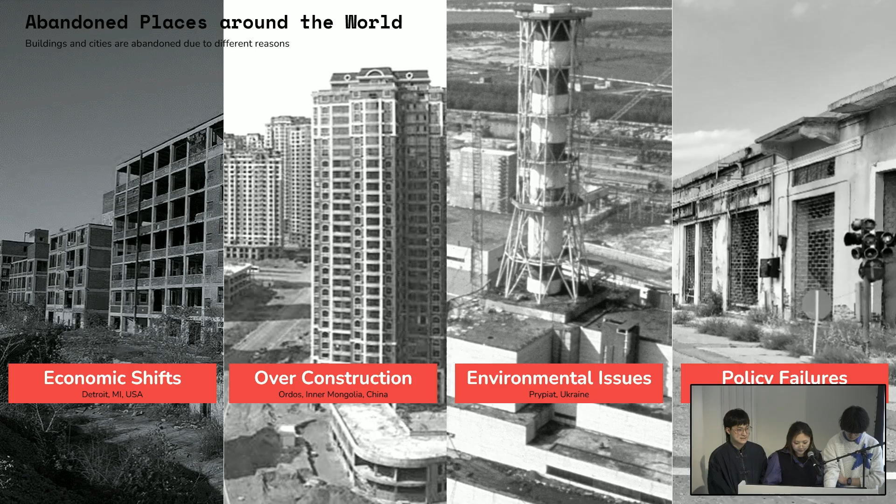Abandonment often results from economic shifts, such as Detroit's decline due to the collapse of its auto industry. Overconstruction is another cause. Ordos, China overbuilt infrastructure with minimal use. And environmental disasters like Chernobyl left Pripyat uninhabited. Policy failures like Varosha, Cyprus also contribute. As architects, our goal is to design cities that evolve and avoid abandonment.

In creating a prototypical city, we focus mainly on addressing key issues of economic shift and overconstruction. We aim to develop a system that can adapt to these changes, ensuring the city emerges to be resilient and responsive to future demand. Tokyo is an example of an emerging city. After the 1950s, it rapidly grew with buildings following a 30-year life cycle to meet modern standards, addressing high land values, earthquake code, and modernization needs.

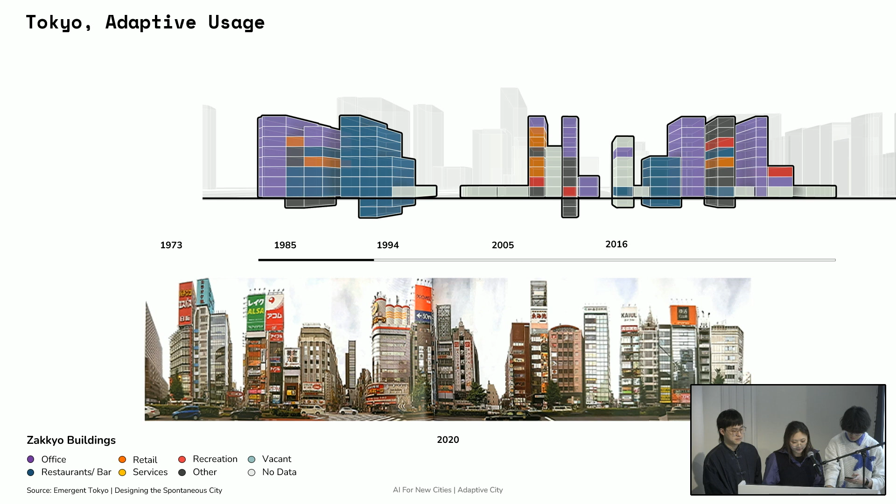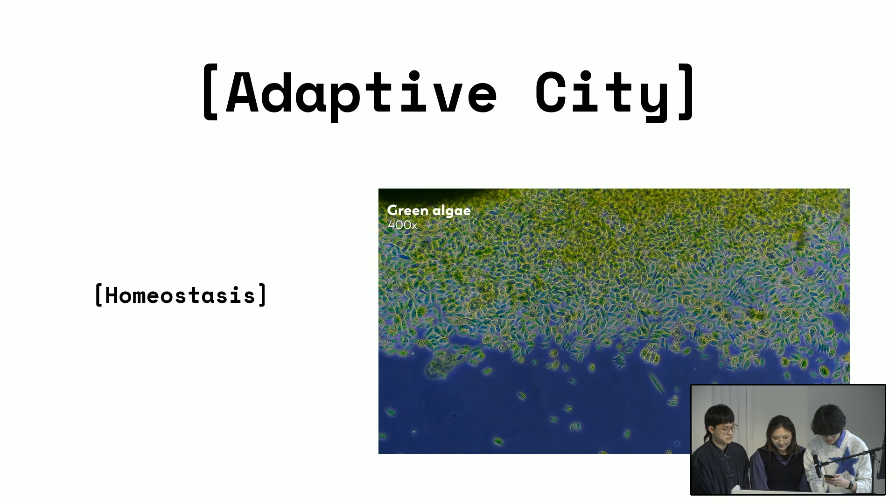Tokyo also features adaptive structures like Zakkyo buildings, which house mixed-use space, adapting to urban needs over time. The diagram shows how this building evolved vertically while retaining the same footprint to maximize space. So we are aiming to explore the idea of cities that are temporary as physical while permanent as a system. Cities as a container for many human beings would be able to cope with potential natural disasters and social context change. That's how the word homeostasis is described.

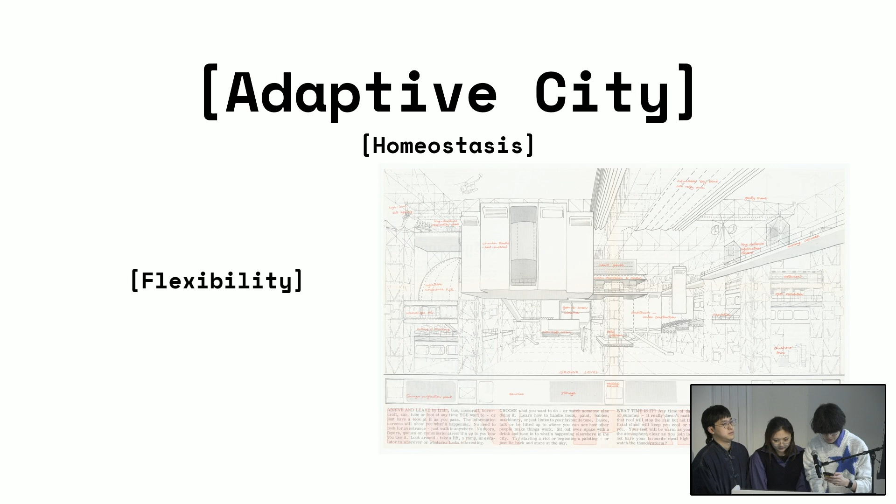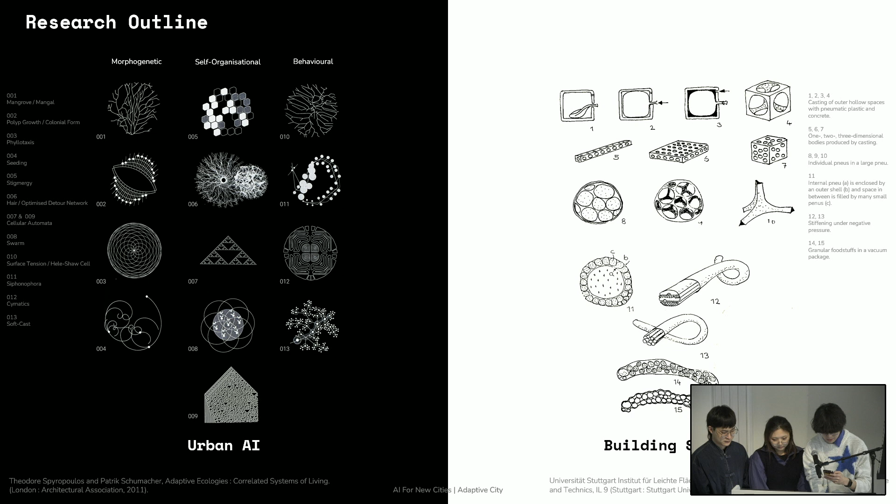And to achieve this dynamic balance, the building should have enough flexibility to deal with potential change, and also time plays an important role in this process. The change will be based on the last second and influence the next second. Our research outline will include two branches, urban AI and building system. In the first branch, we are exploring the simple rules of urban growth and the logic of function switch in the city. While for the building branch, we are exploring the system that brings energy into the building and allows the change to happen.

So in our first chapter, our urban morphology is inspired by how cells just follow the basic behavior that's recorded in their DNA and aggregate into very complex creatures. Our previous research is about how to use a global field to control the growth, and we explore how the different behaviors that we input change the output pattern.

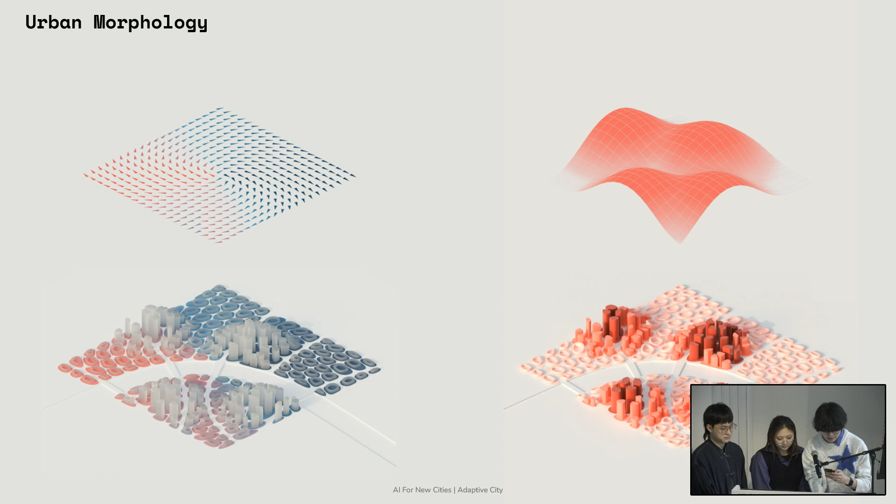And then we want to push this simulation into a more realistic approach. We start to think about how these cells behave in real cities, and also what the buildings' behavior will be in the cells. So we set different behaviors of both cells and buildings, and they are influenced by the previous stage, and transfer their properties to sub-elements. Using their behaviors and just the initial conditions, the city can grow itself.

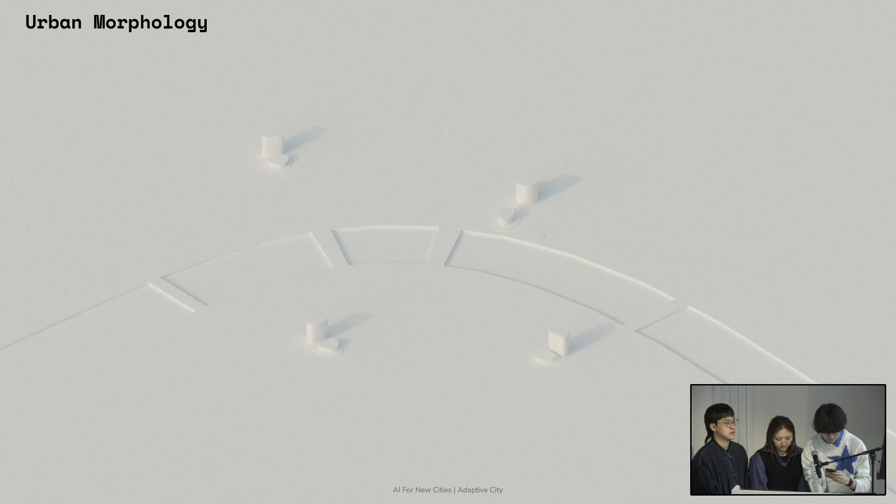So we are exploring the two approaches at first. No, sorry.

So for the site, we chose Canary Wharf. From the old time, Canary Wharf was a dockyard that played a major role in global trade, which lasted until 1960, when the dock fell into decline. In the late 1980s, the area was redeveloped into a modern financial hub. Skyscrapers like One Canada Square in 1991 symbolized this phase, attracting major banks and financial institutions.

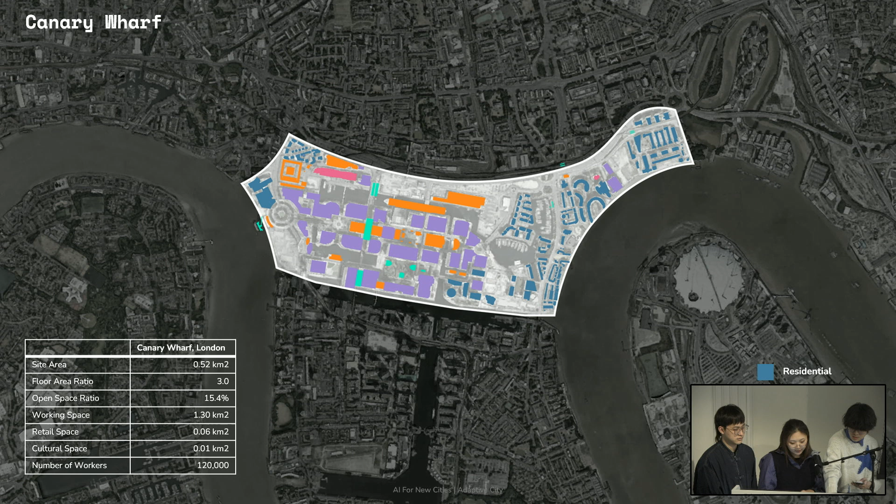However, due to the high vacancy rate, Canary Wharf is adapting itself again by adding more residential development and becoming an integrated neighborhood with entertainment, shopping, and parks. This mixed-use approach aims to reduce reliance on office tenants as hybrid work and changing market conditions challenge traditional financial districts. Here in this chart, you can see that the vacancy rate of Canary Wharf offices is high, and it goes as much as 50%.

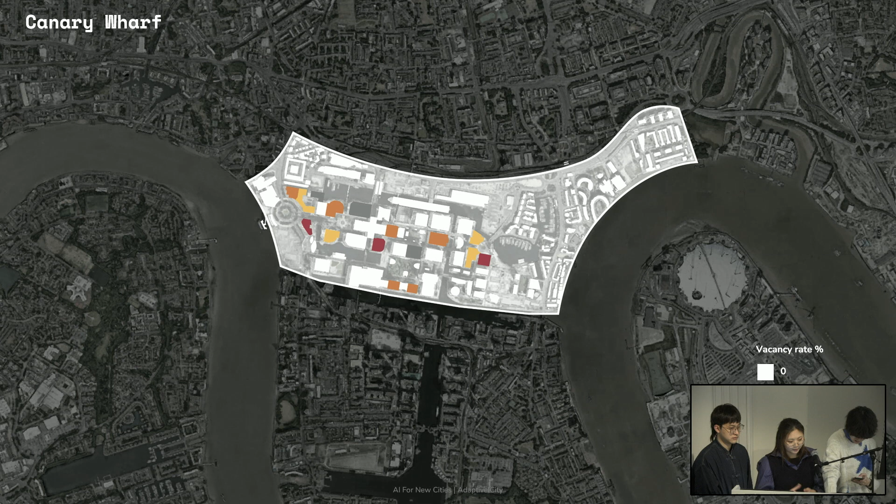From this information, we know that although it tries to change or adapt, it's not fast enough, and people will still move forward. So that's why we want to try to integrate our building system into Canary Wharf to see how it would go.

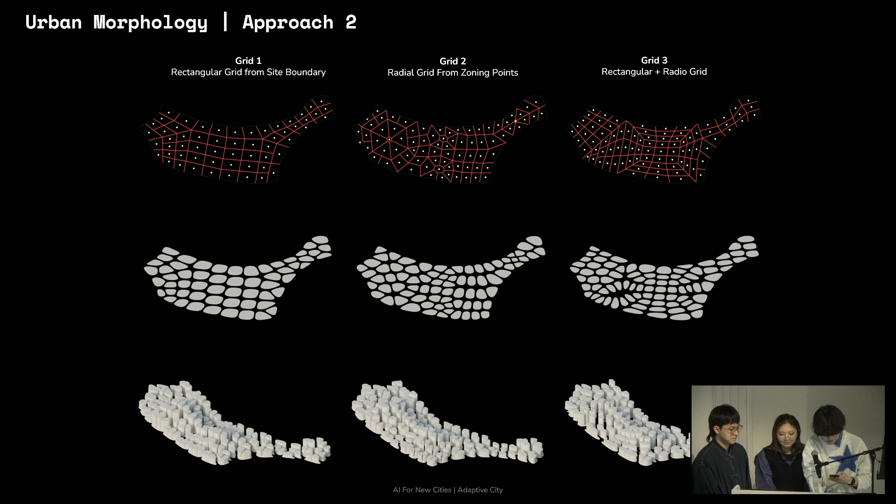So at first, we were exploring two approaches. We first tried to use only the vector field to control the growth, and we also input the existing grid, which gives a more top-down result. So now we're choosing a middle way: to use the field to control the growth, and at the same time, we input the infrastructure to influence the boundary of the pattern.

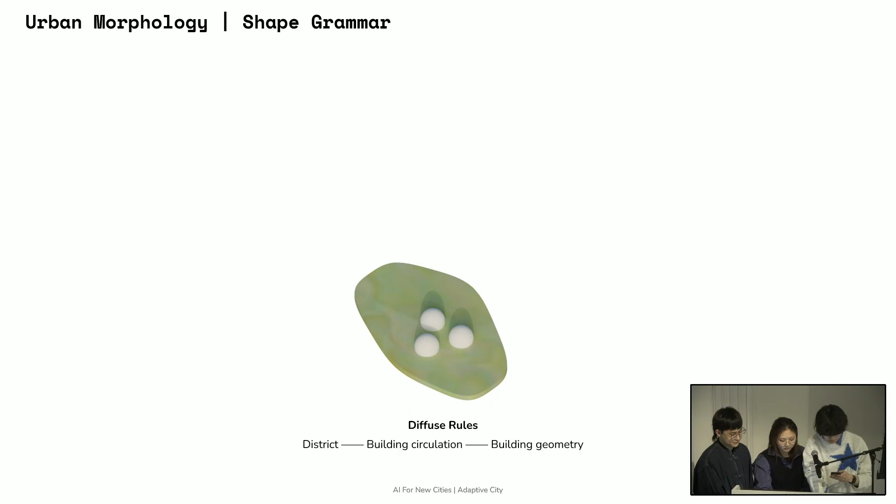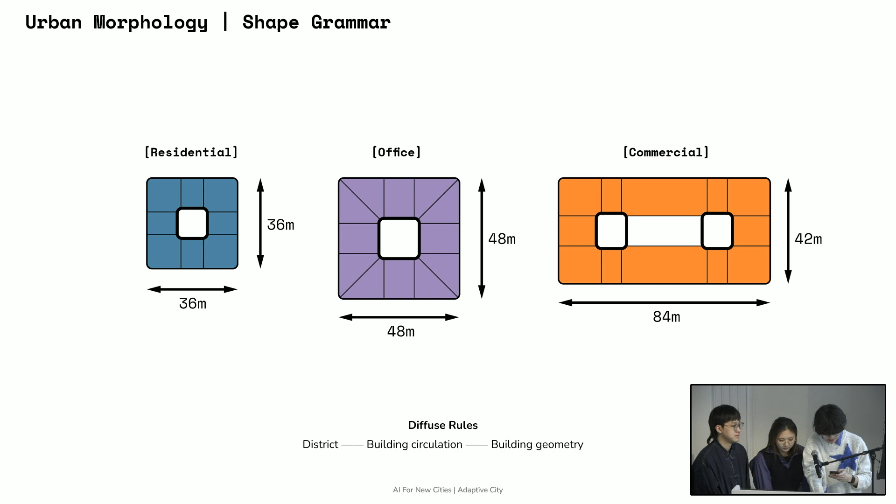So to put the building inside the district, we use the logic of diffuse to get enough distance and create the main circulation of the building. For mid and high density zones, we are using 3 basic floor plates, and these floor plates will also give us some freedom to change the function later. For the low density zone, we are trying to merge different circulation to create a continuous footprint.

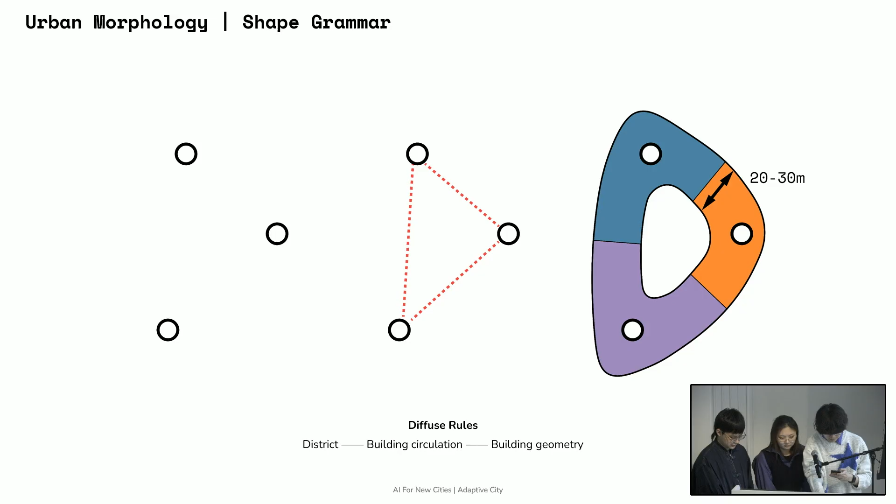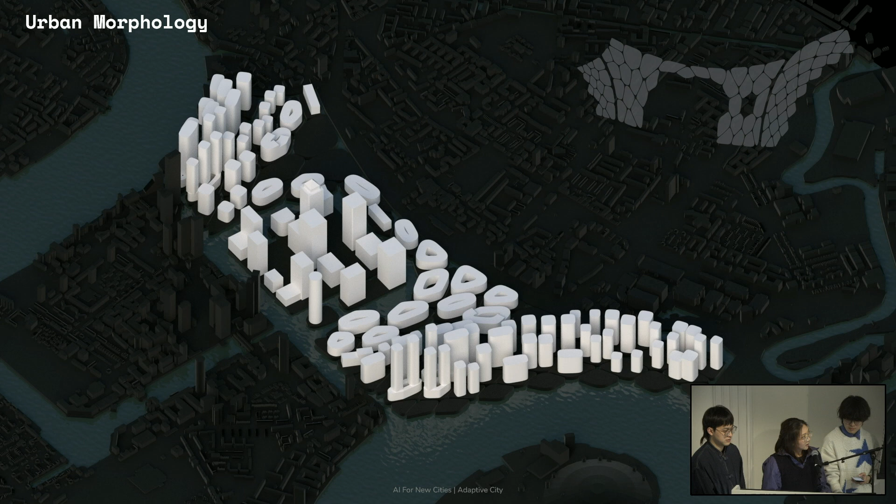And this is our urban simulation based on the rules we talked about before. For our urban morphology, we learned from Tokyo how they have hybrid buildings with a convenient walking network for people that greatly increases the accessibility for most of the buildings. The buildings are connected in 3D space and become 3D alleyways of the city. This type of network inspired us to connect our buildings in 3D space vertically.

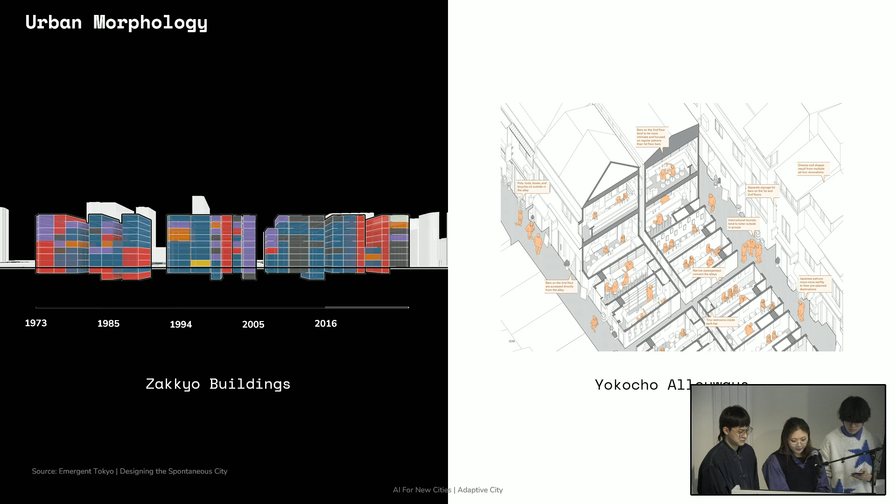Here we introduce the line network that will carve out part of the building to retain the relation of urban space with our building blocks. This line will emerge from both global and local rules. The global rule is that the 3D network will try to connect itself, pointing to the city center, or in this case, the green space, while locally the line will open the ground area of the building to create an opening facing in or out of the street adjacent to the parcel.

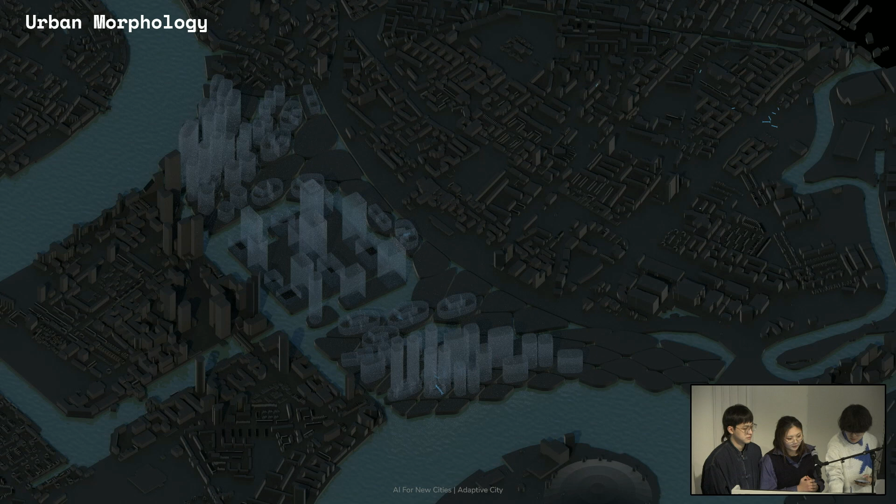The red line here shows the 3D connection coming out of the border of the parcel in space while attracting to the green area as mentioned. This line then translates into the low poly surface, ready to carve out of the building, which will give each building character in relation to the urban surroundings. Here's an example of the carved out cluster of the parcel with the blue line. And this line shows the growth of that 3D network that would connect the building blocks together while carved out.

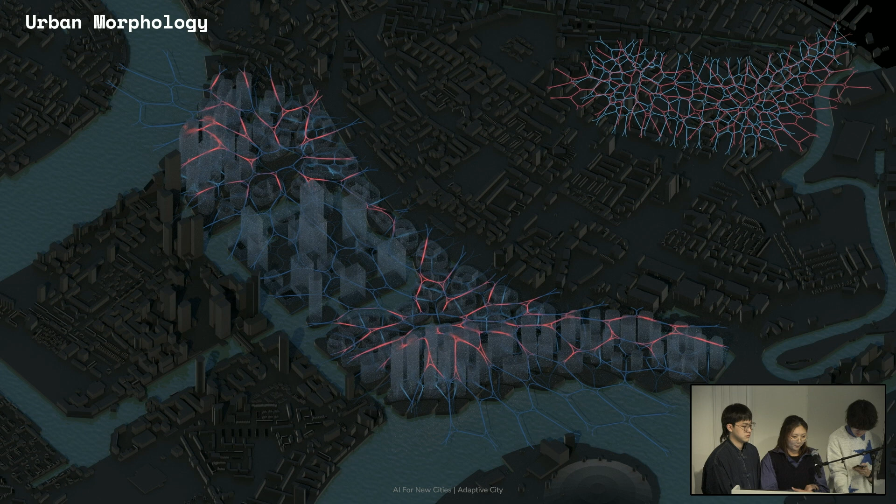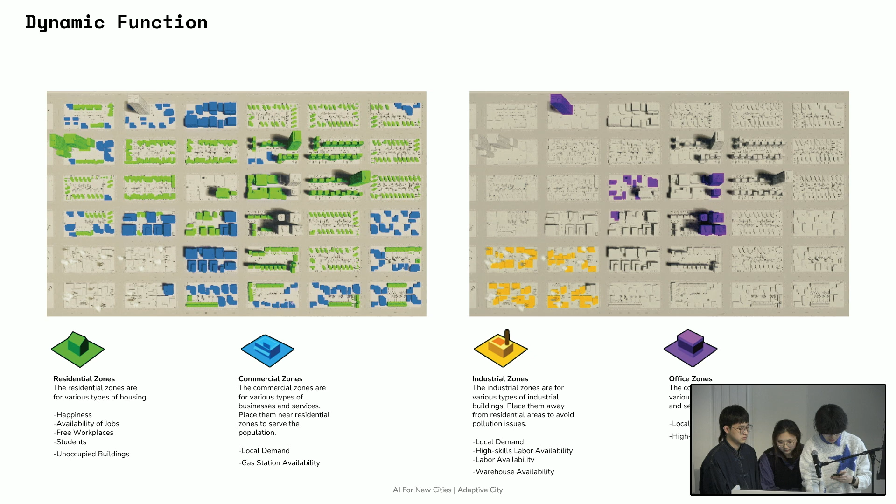So another issue we noticed is that in Cities: Skylines, abandonment also happened, and they have an algorithm to evaluate it. The evaluation system is based on different functions, while the only way to use the abandoned buildings is to demolish them. So for our dynamic system, we are trying to allow them to change the function based on simple rules. So we will have 2 kinds of agents at first: the first is the construction agent, and the next one is the openness agent. Within the construction agent, we subdivide them into different functions.

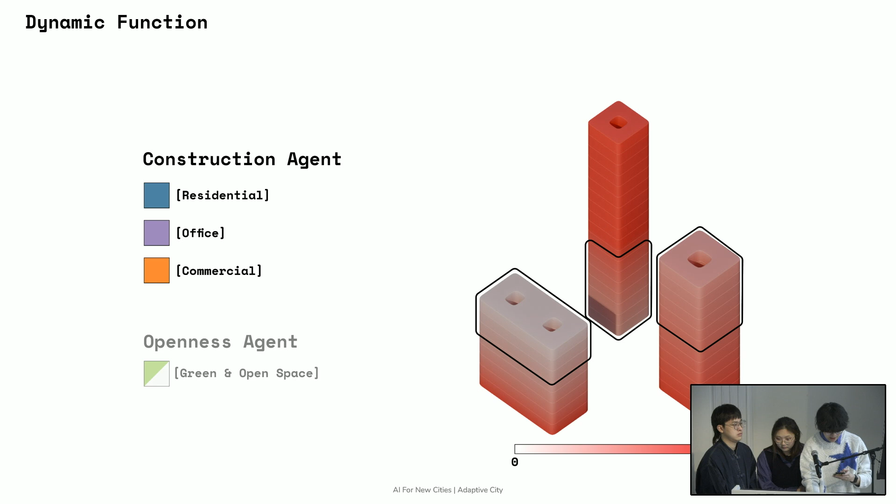So we will evaluate the score of each unit, and if the number is lower than a certain number, they will try to sell their unit to another agent. And if another agent can get a higher score here, they will be willing to take it. The green and openness agent is a special rule. The construction agent tries to sell their floor to the openness agent because they can create a gap between different functions and improve the quality of what remains.

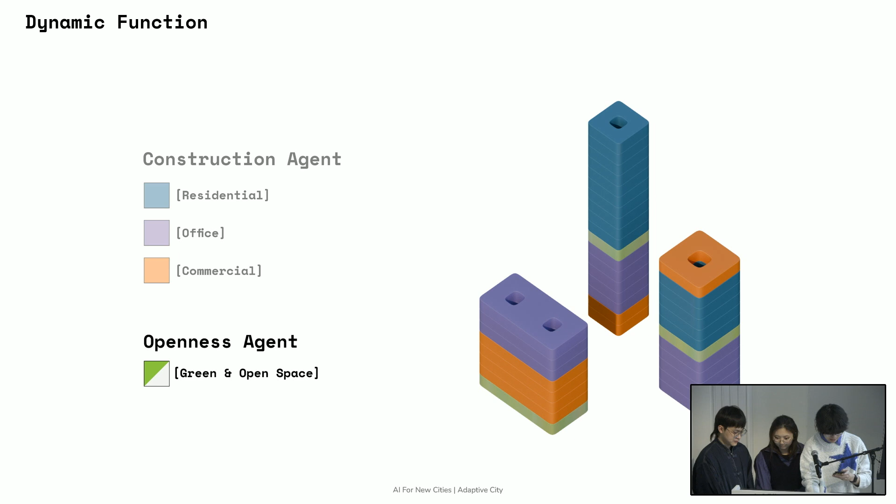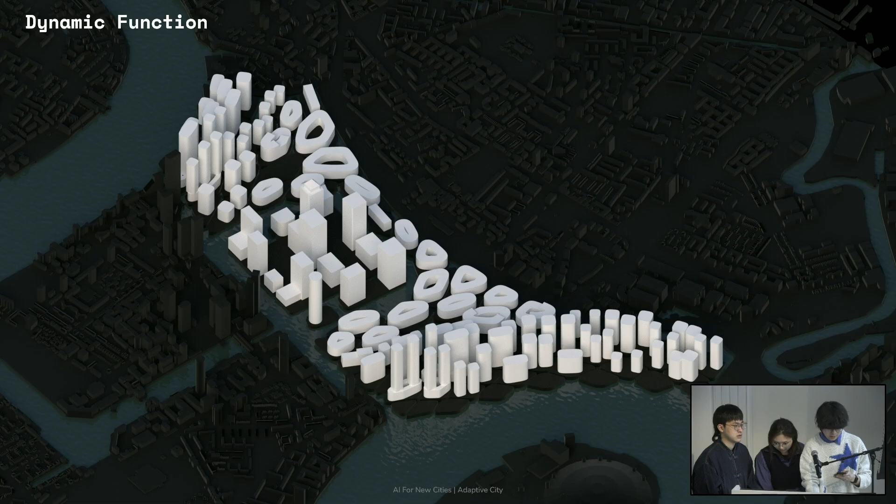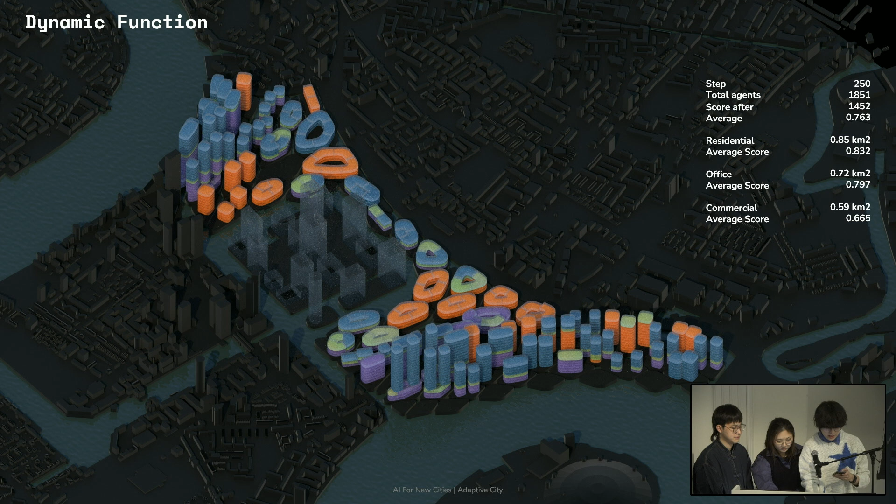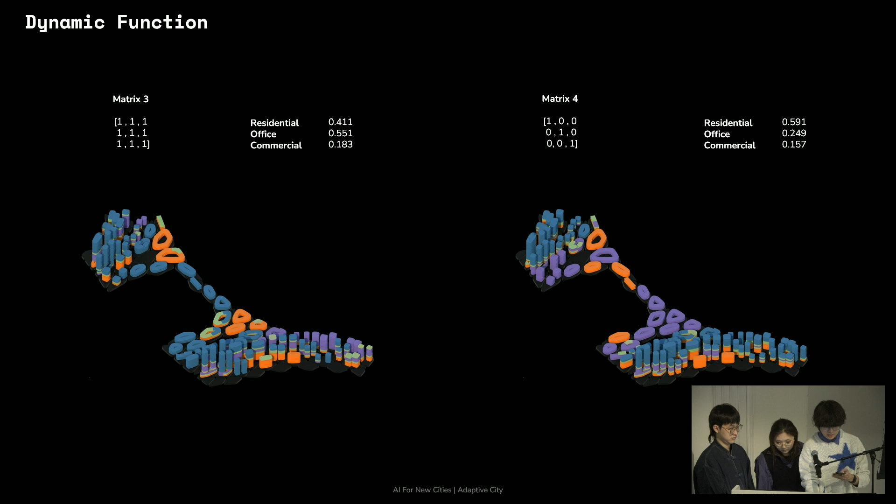And the score, the evaluation system, is based on this function matrix and the distance and the height function. So that's the way we evaluate the score of each unit in our urban simulation. And we are able to see from the output that each unit gets a little bit higher score than the previous one. And we also set different matrices for the simulation, and they give us different kinds of output. And this is a way that we can control how to influence different functions at the urban level.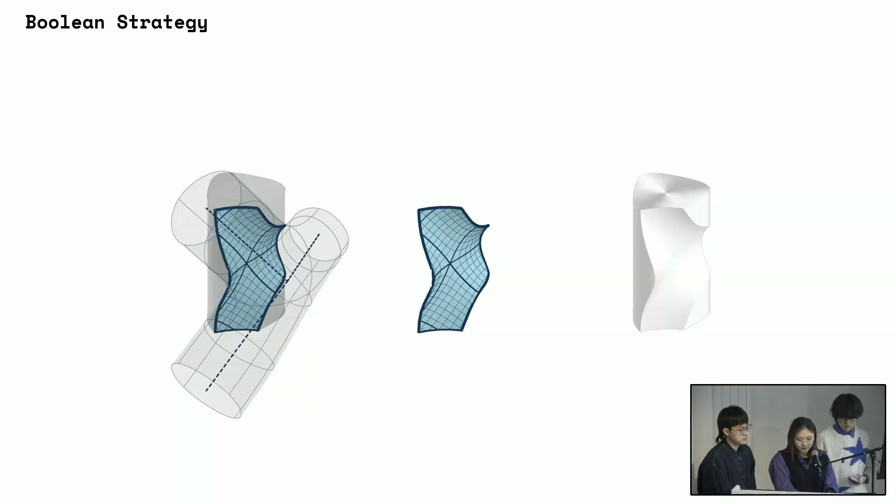So we first tested the Boolean between a primitive geometry and a hypothetical pipe from a different set of curved networks to see the possibilities of geometry we could get. We mean the geometry based on the different number of line connections, from 2 to 5, that cut through the building, at which points are moved within a given bound.

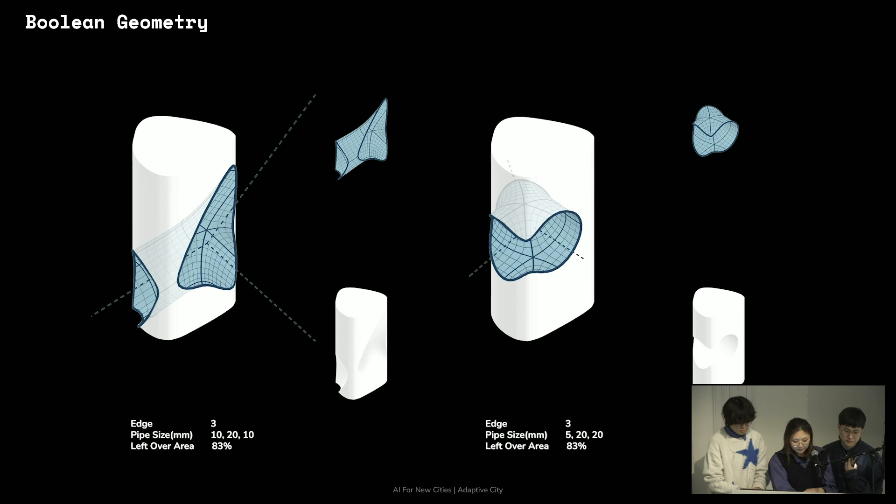The radius of the pipe at each node also affects the outcome. And from this, we select a result that has more than 65% of the volume left, which will be the functional space. And after that, we study the cut and try to put structure in it.

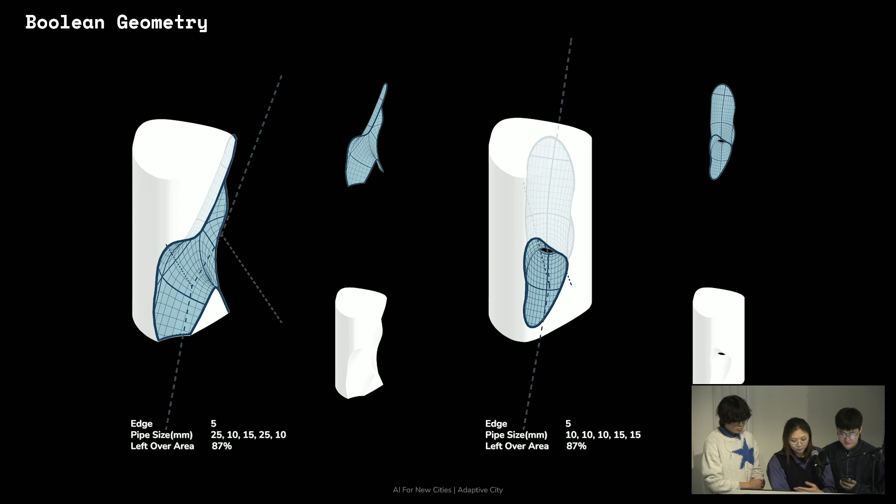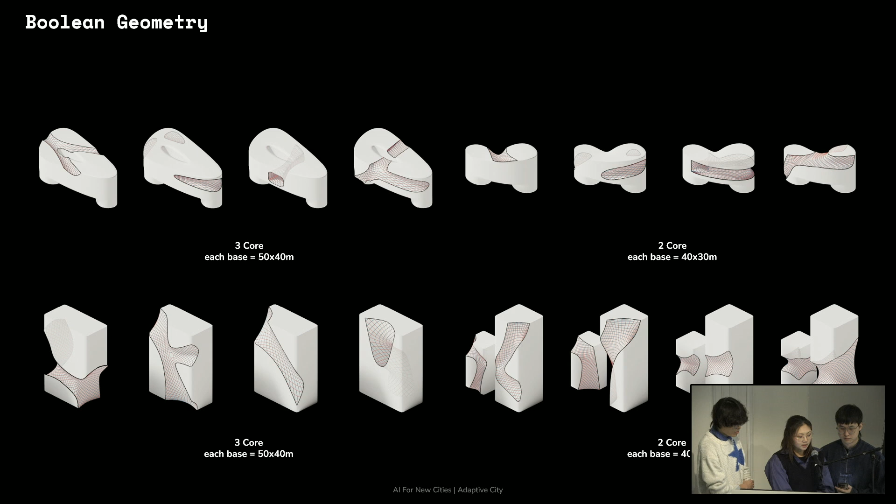So here we try to use the Boolean line with our building geometry from the shape grammar. For the low density, we have 3 core and 2 core accordingly. So for this cut, we categorize into 3 types. The first one is to cut at the top, which will create skylight.

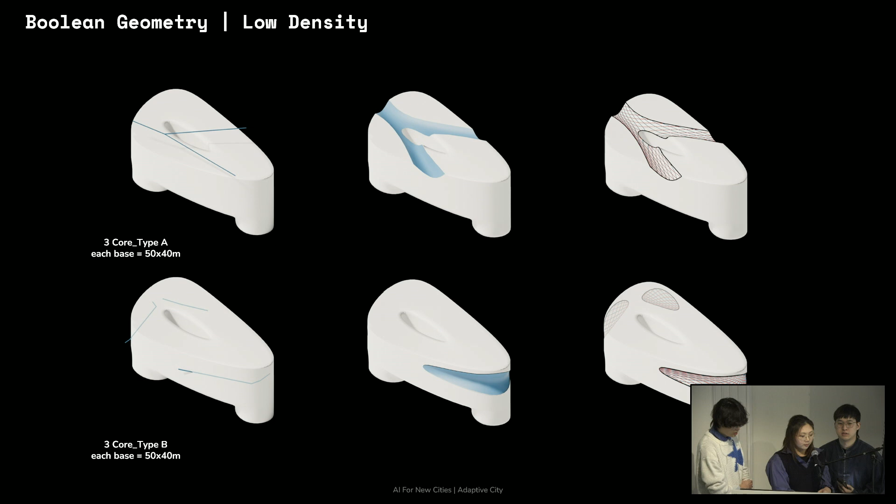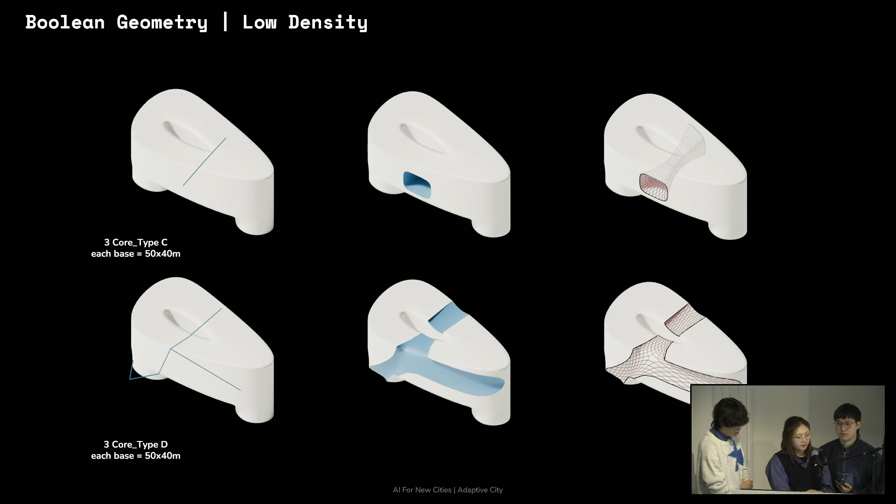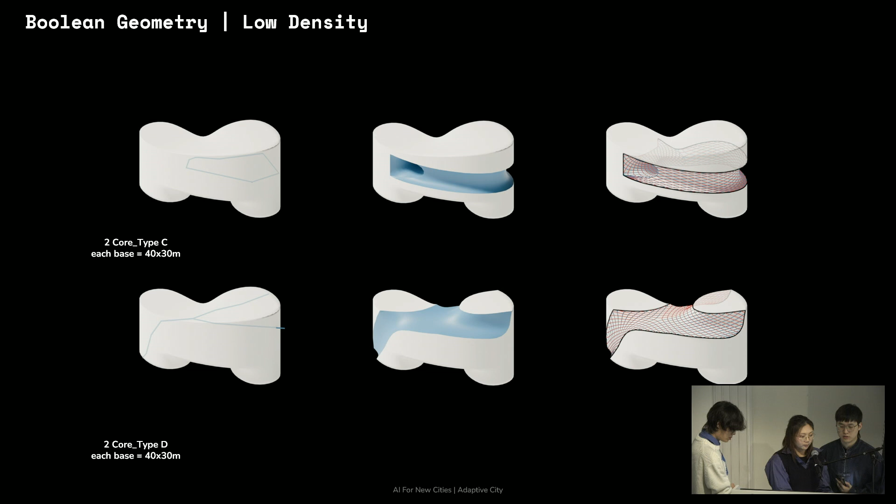And the next one is the side. This could bring out the opening and could also make a balcony. The third one is the cut through, which could create the bridge in between within the building space. And the next one is the mix between any of those types. And this will follow the same rules. And you can see that with different type of geometry, it will also create a unique type of space within.

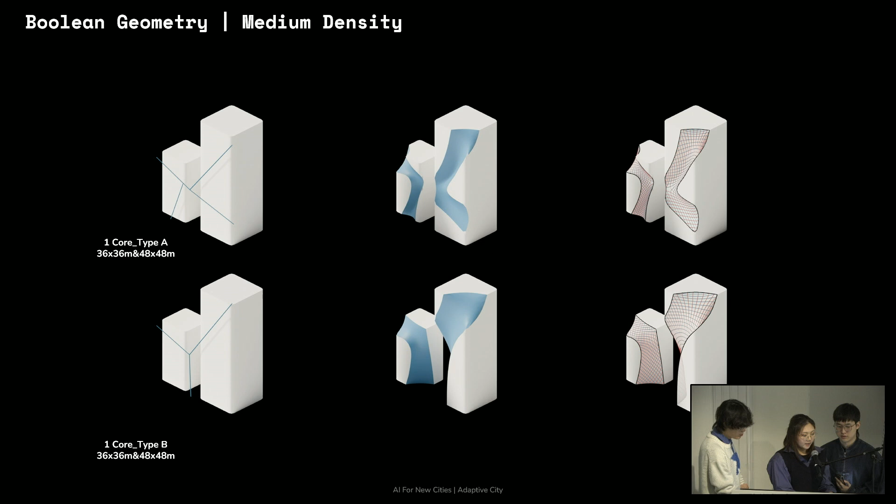For the medium density part, we use the cut line with slightly different logic. So here is the 2 cut line that will carve out the building to create an opening, or the 3 cut line Y shape that will create some facade for the building, and 1 line or cut through as well. Here is the line that goes from 2 buildings together that pair up and cut with the same line here.

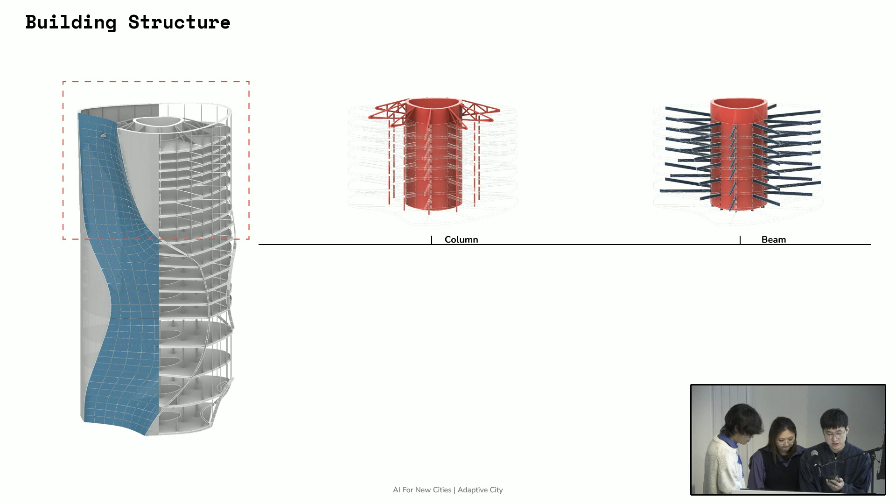Yeah. Okay, so to meet the needs of the rapid functional changes in the urban system, we have introduced a mega truss system. At the top of the building, we set up a mega truss. When there is a need for cantilevering, the vertical loads are transferred upward to the mega truss by means of high tensile steel column in the form of a suspension system. And then the loads are transferred to the foundation through the core.

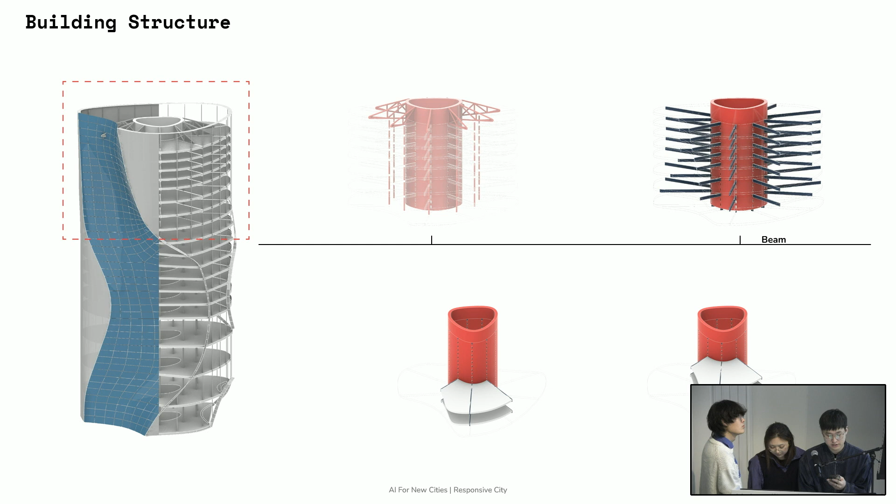So besides the column system, removable beams are connected to the core, which means that the height of the internal space can be changed to satisfy the need. And so this beam and column structure can help to enable the building to adapt to different functions over time more efficiently.

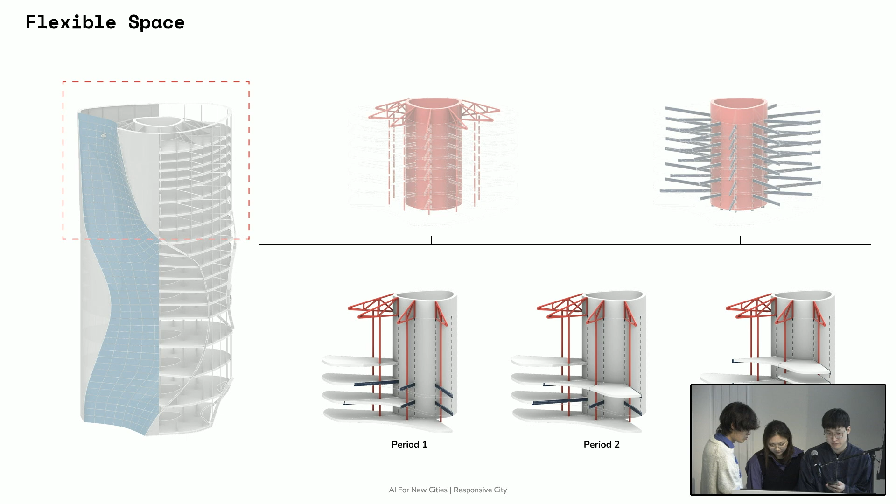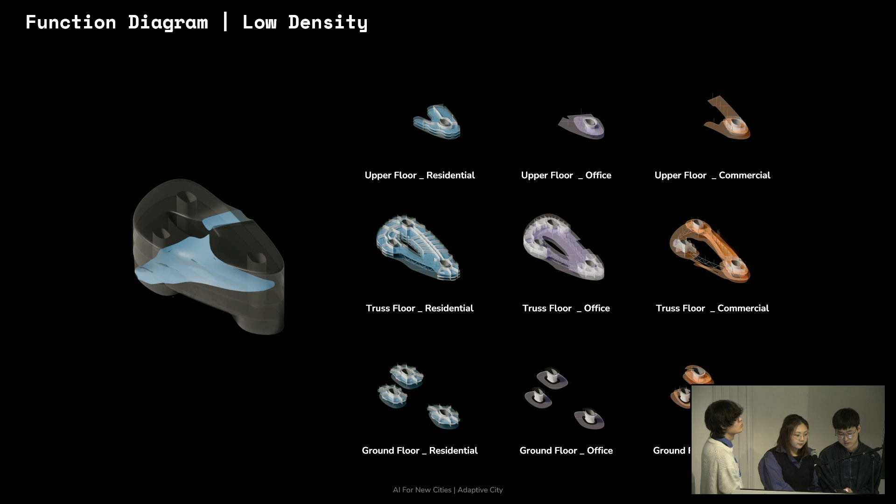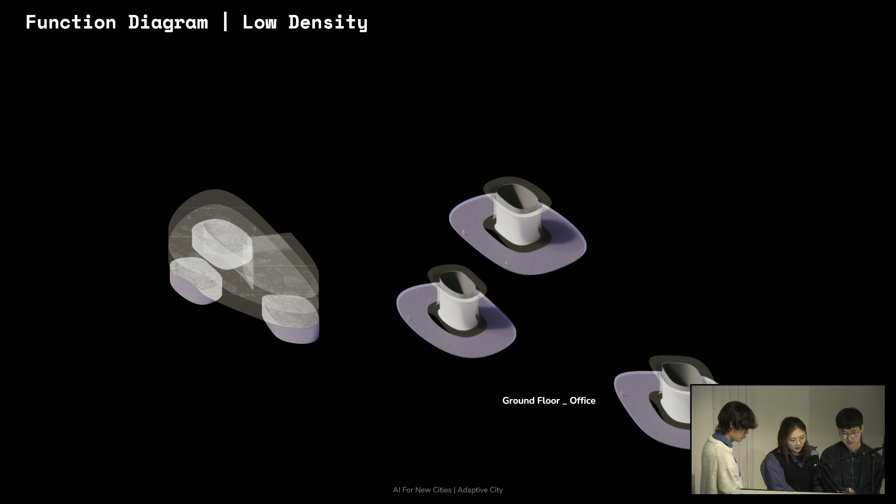So here is when the function comes in. For this example is the low density building. We try to see that for each function, each floor type will create a different space. So here for the residential on the ground floor, it will create some reception space that tries to bring people up to the main space. So as well as the office, but the office space will have a taller ceiling, and the commercial will create a feature that tries to bring everyone upward.

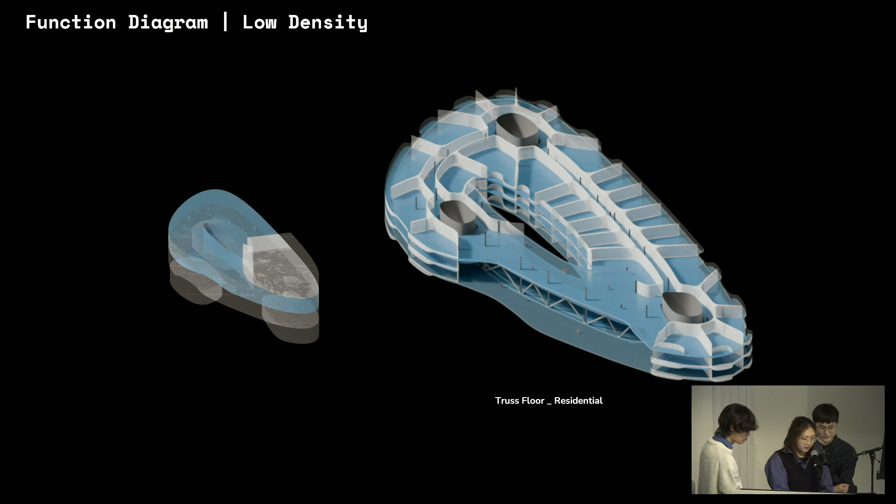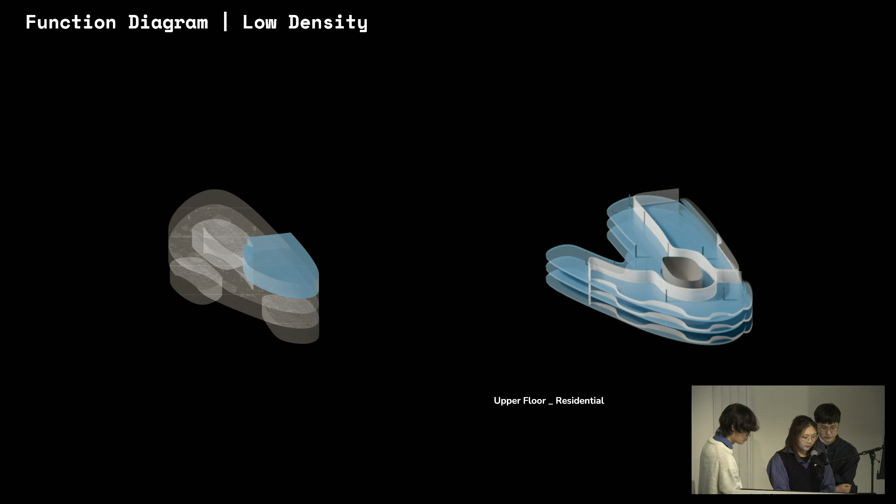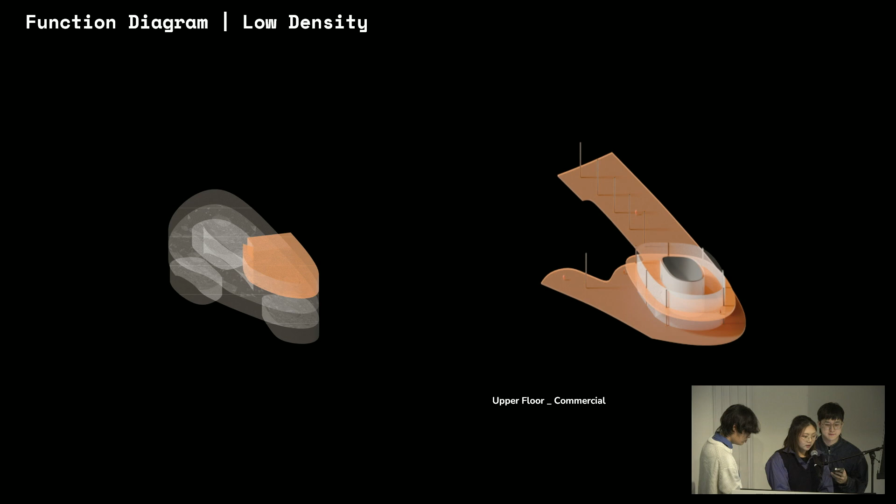Here is the truss floor, which he mentioned before. So for the residential, this is for the office and commercial accordingly. This one is the upper floor that has a smaller floor plate. For the residential, it will become a bigger unit type. And for the office, it would be where people meet and chat. And here's the commercial space.

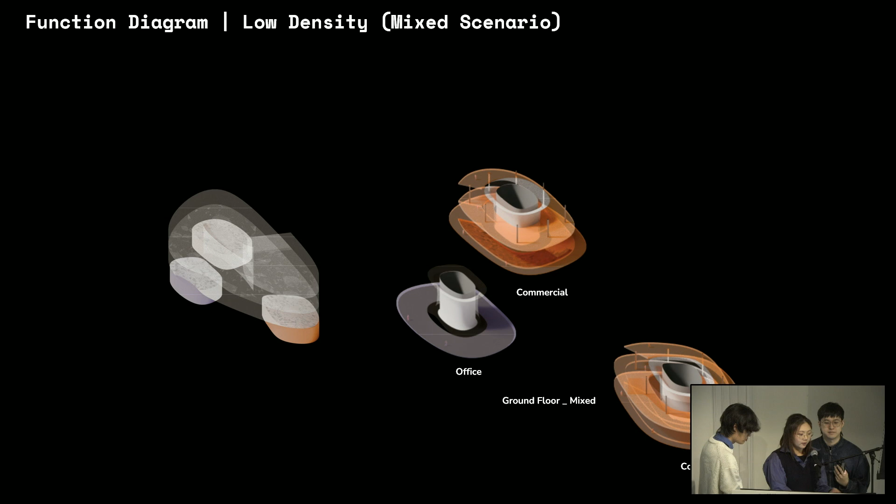So our thought for the low density is the mixed scenario, that not every building will have one function, but the function will come out of each core. Yeah. So for example, this is where commercial and office meet, and at different levels, it will create a different space with different function.

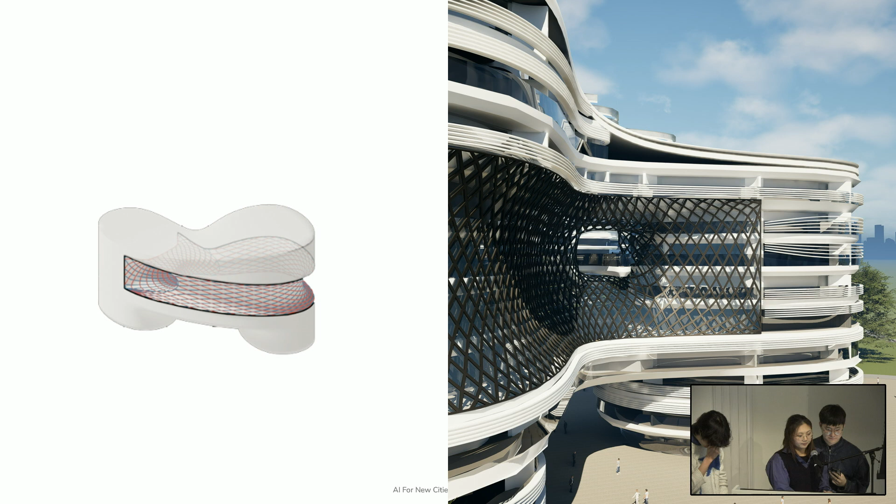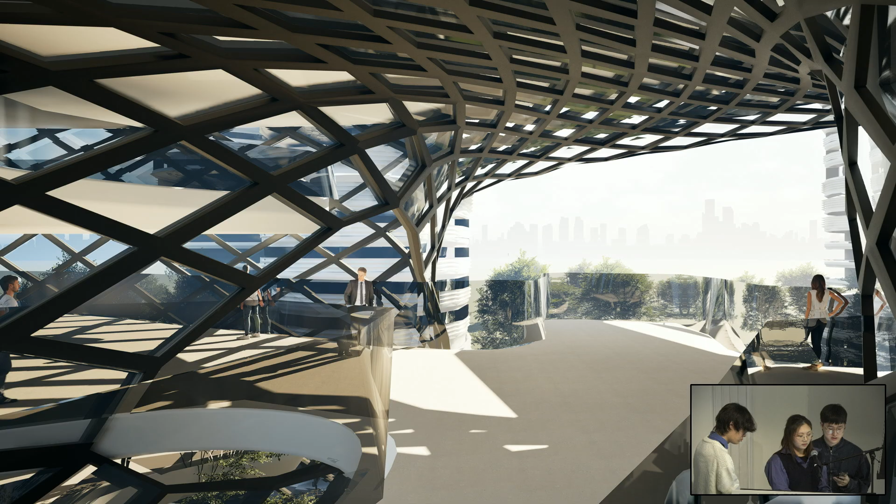And here's some representation of what we think our space will look like with the Boolean line. This is the cut-through type. This is the ground opening that I talked about. And here is the bridge in between. And when the Boolean happens, it will create a public space and bring people together.

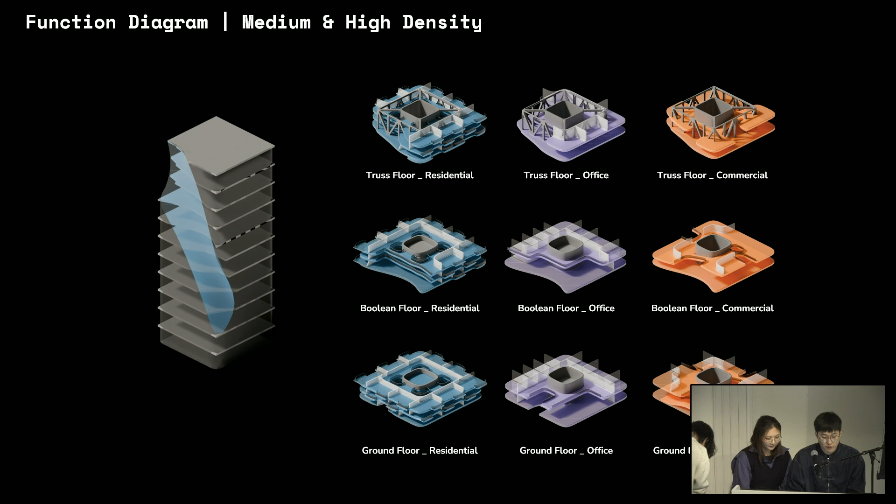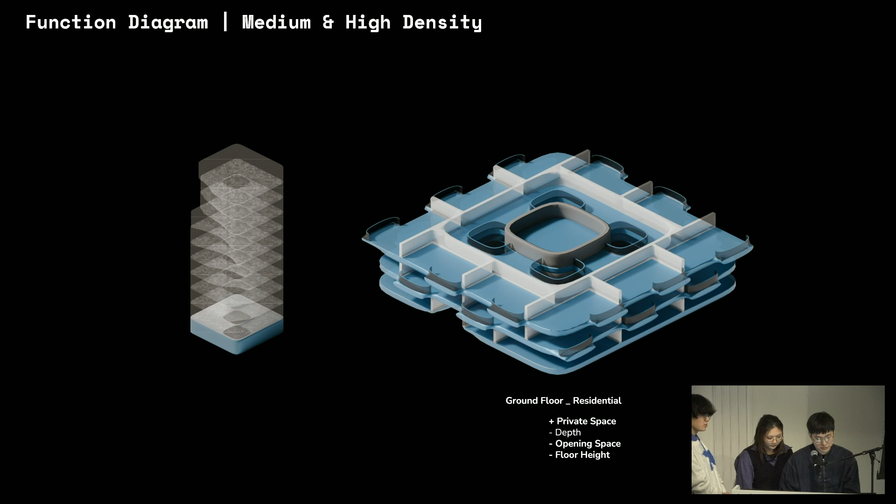Okay, for medium and high density buildings, in the same logic, the floors are divided into ground floor, Boolean floor, and truss floor. For the ground floor, since it is not affected by the Boolean part, it is also a default layout form in itself. Residential areas often require less depth, meaning more atrium can be placed around the core for the light. At the same time, due to the height release, the residential area will often divide into 3 floors.

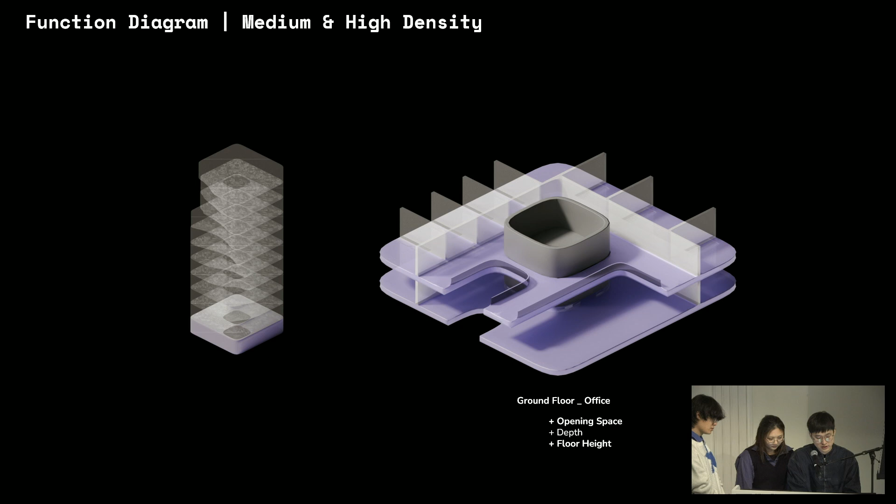On the contrary, the office area needs more depth. At the same time, we have placed larger multi-story opening space. In a commercial space, it would become a ramp that spirals upwards. The space would become more flexible and various.

Next are the floors affected by the Boolean. We think that these types of floor will have more open space. The Boolean tends to create a more interesting opening space from our mind. Although it reduces the use of room, it will improve the overall user's experience.

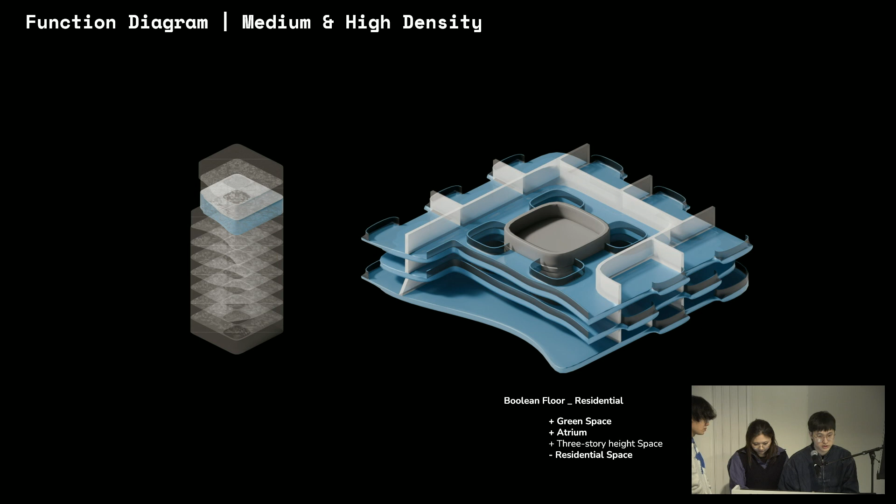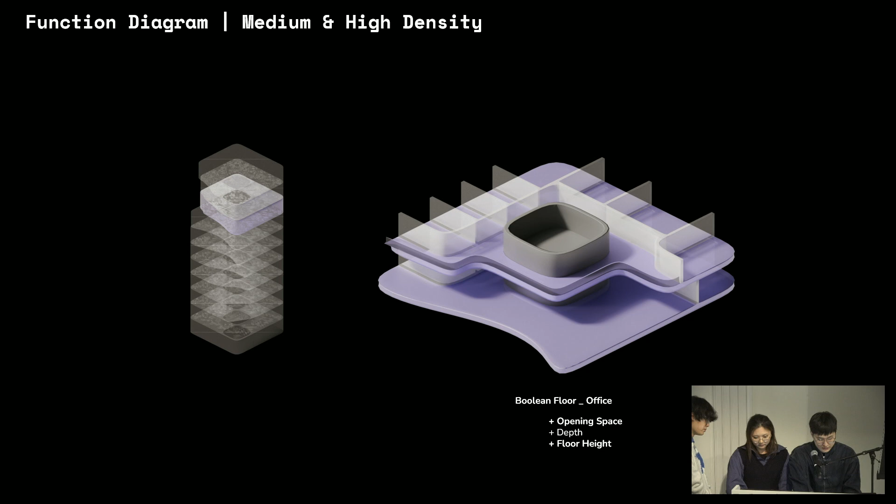So in the office space, the space near the edge of the Boolean often becomes a space for communication, and the layout of the room often changes accordingly. So in the commercial space, the Boolean part brings a pure public space designed to give a sense of breakout space in a large, high ceiling space.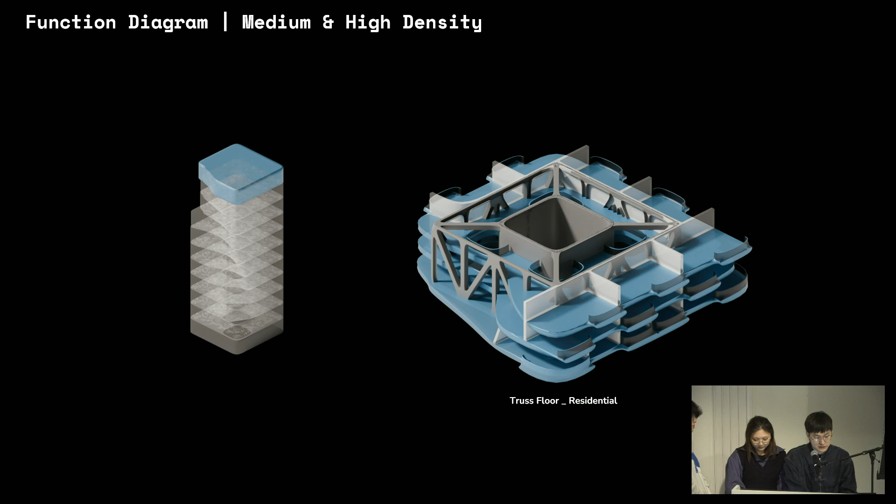Since the building itself is a medium or high density space, which normally will be like 132 meters tall, the mega truss is like 12 meters high. In addition, the truss layer serves as a structure layer. We also want to have its primary function. So this is the residential one, office one, and the commercial one.

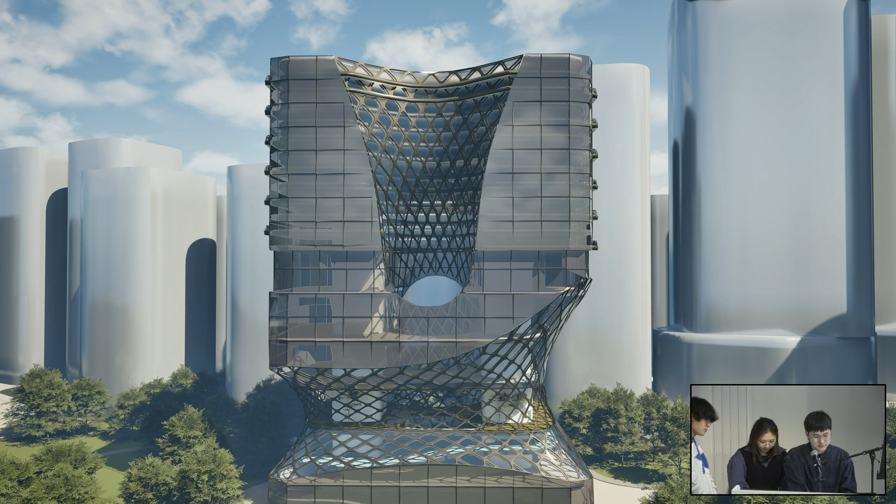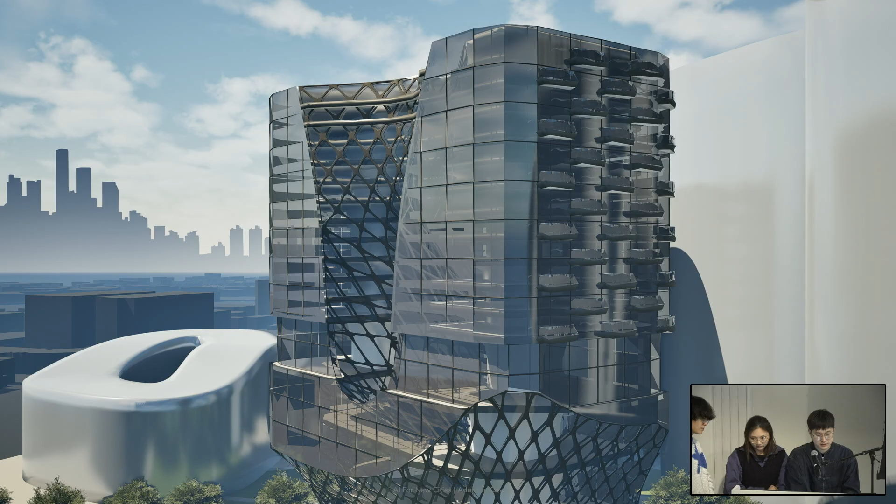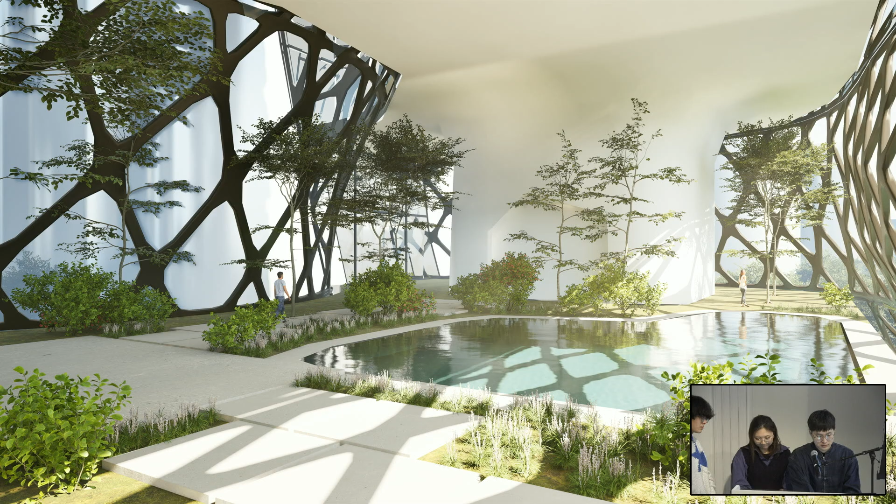Okay, so these are the scenarios of our medium and high density buildings. And this is the facade of the cut-through building. And this is what we want to show. We use the grid to describe the surface of the Boolean part. And for residential functions, we want to use separate balconies as a symbol to show its function. And also between each functional part, we have a green space to have a breakout feeling.

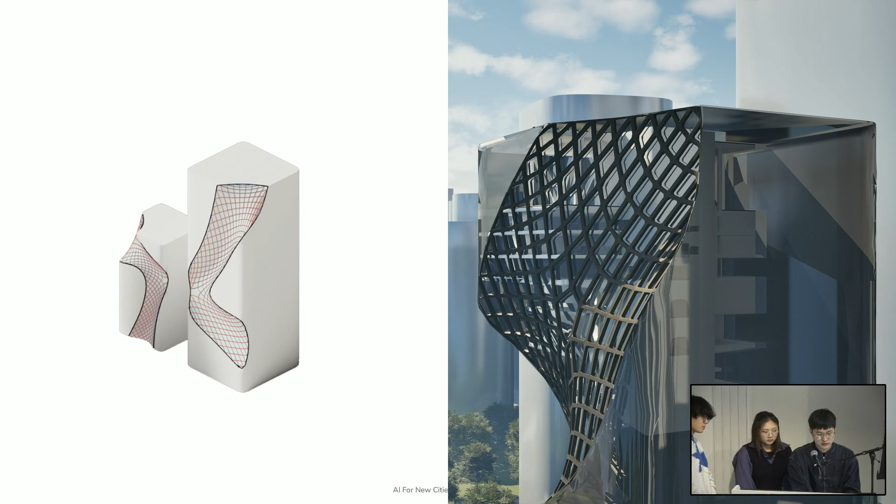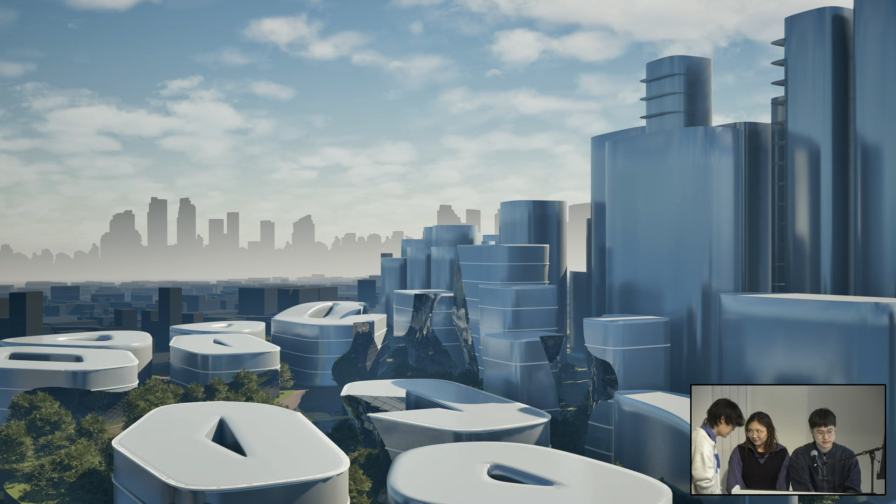And this is another type of the single core building. So this is the inner part of the office area. So we tend to have a two-story opening space. This is the overview of our city, the bird's-eye view.

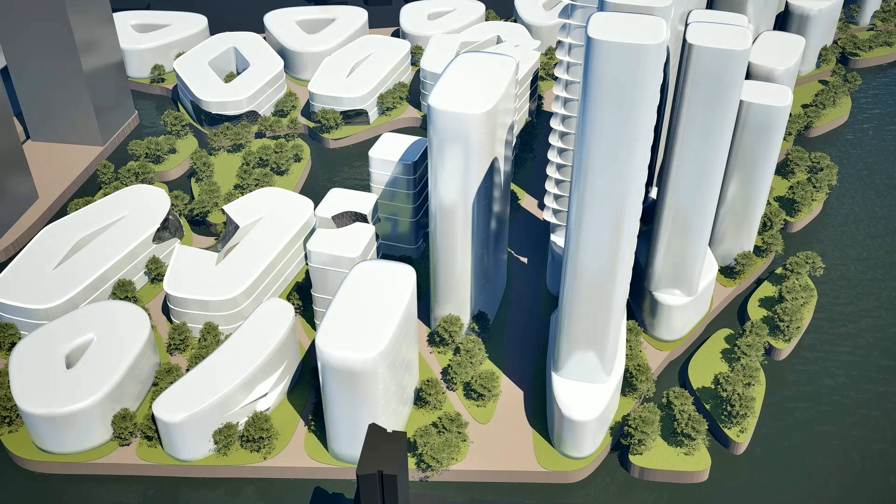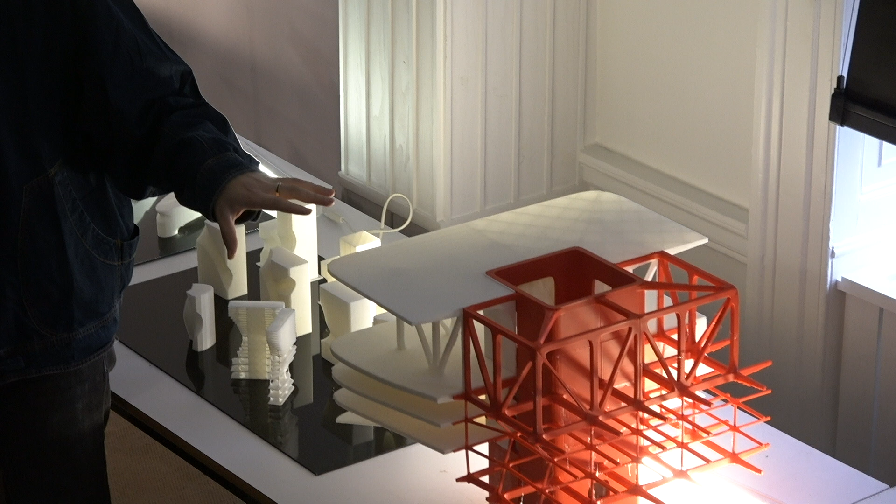This is the detailed model. We want to show how the structure and the functional area react to each other. So the first layer is the truss floor, and this is residential. So for residential, for the area near the Boolean part, we want to create more opening space, which we think is more interesting. And also the rooms near the Boolean part, for example this one, because they are too small, will merge together.

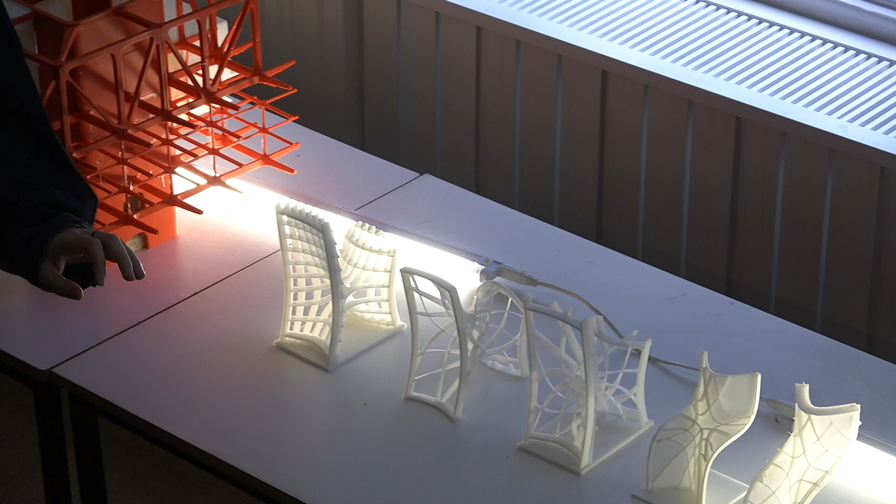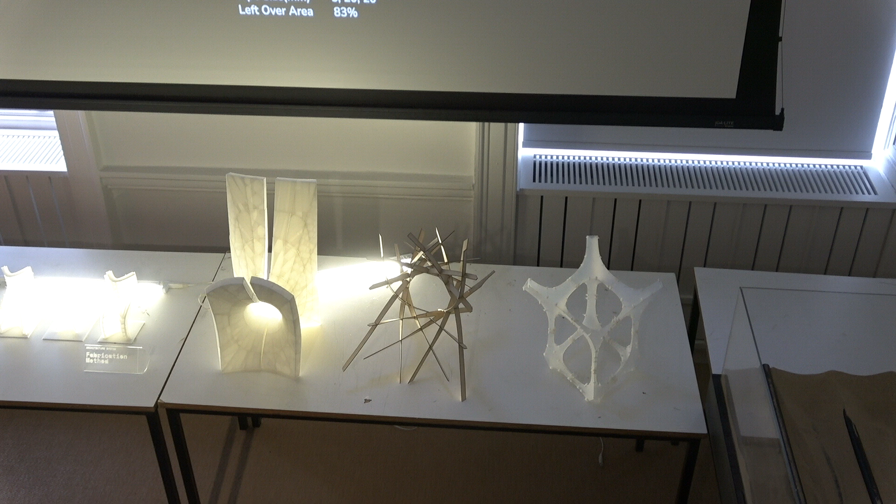And this is also how we got the grid line of our facade. Because of the result of the Boolean, most of the facade will be double curved. So we first tried to use contour lines to describe the surface, and then we tried to use asymptotic lines, and then we also tried to use timber to assemble that. But we found that it's really in high tension, so we tried to low poly all the mesh to have our facade iteration. Yeah, that's all for the physical model.

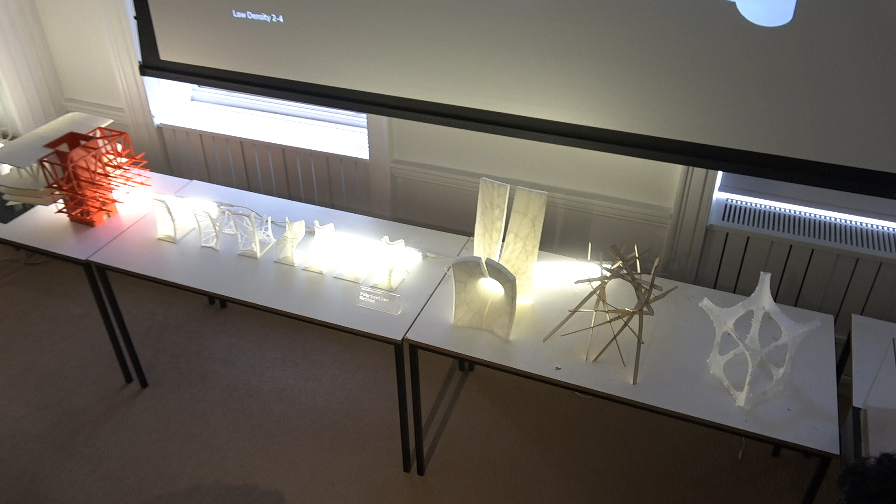Hi. Hello. So yeah, congratulations. It's such a beautiful project, and I love the way each building looks super unique, and it really does bring a specialness to the buildings, and then the fact that it connects the city. It's really cool because you went from one unique building to one unique part of the city.

So I'm sure a lot of the people that practice here know that when you start with a skyscraper, the first thing you do is build an envelope of what the city allows you to build. And that envelope is guided by rights of light and privacy. So maybe I missed this part in the presentation, but what would be cool is if the pipe that you're Booleaning into this city was actually guided by city ordinance, rights of light and privacy or whatever. Because when you're working with a developer, they're really small thinking. They're not big thinking. So you almost have to convince them that subtracting area is actually adding value.

Trust me, I do this day and night, because as designers, we love volume. We love double height space. We love the grand gesture that this pipe is building. But in a way, again, I'm always thinking of concepts and then making them real.

A really great way to convince people, like, we gotta subtract this area, which is equivalent to like, whatever, 100,000 square feet or something, is by saying that uniqueness is actually giving more rights of light and privacy to that building there, which you also own, because I imagine you've got the same developer going across this whole swath of land, and then that starts to create a story and give everybody a better view or a better connection, or it's like you have to convince people why you're subtracting volume.